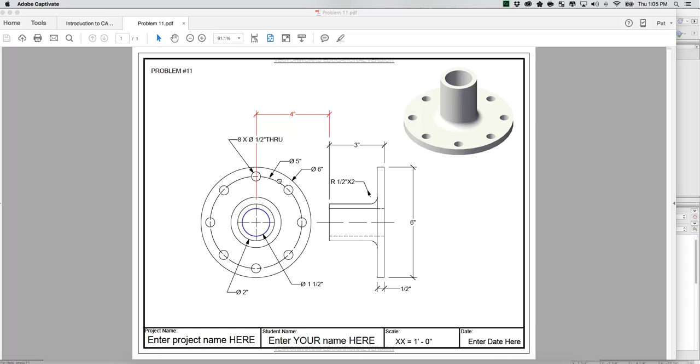So let's get going. The first circle we're going to draw, the blue circle, looks like it is a diameter of 1.5 inches. All right, here we go. Let's start 1.5 inches. Let's come over here, diameter 1.5. Okay, here's our first circle that we're going to start with.

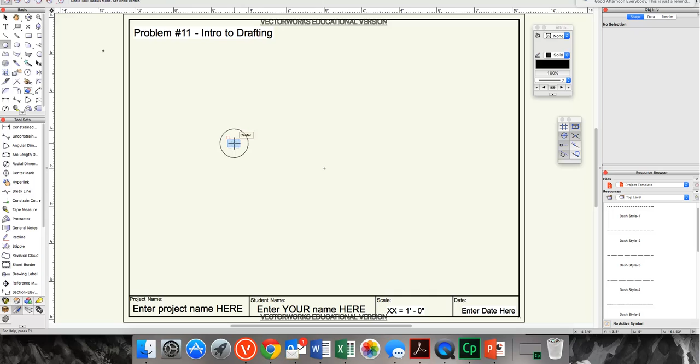Now, the next circle is a 2-inch circle. So let's give this guy a try. And 1 inch right there. There we have our next circle.

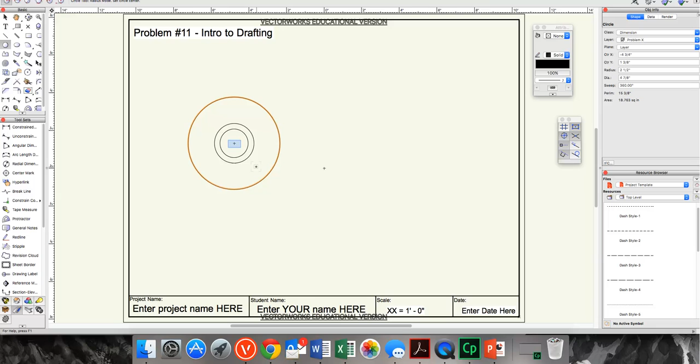And the third circle out, you'll see that there's not a dimension on that. So we will get to that point and we will be able to draw that once we get this piece over here done. So let's move out to the next circle, and that is a 5-inch circle. Again, snapping from the center. And here is our 5-inch circle. And the next circle after that is a 6-inch circle. And here is our 6-inch circle.

Now, if you look really close, you're going to see that this second circle here is dashed. And you have to look close because the circles are right on top of the dash, which is weird, but that's the way it works out. It is a long dash and short dash. So we're going to come over here to our line types, and I think it's dash style 9. So I'm going to drag this over, and here's our dashed line.

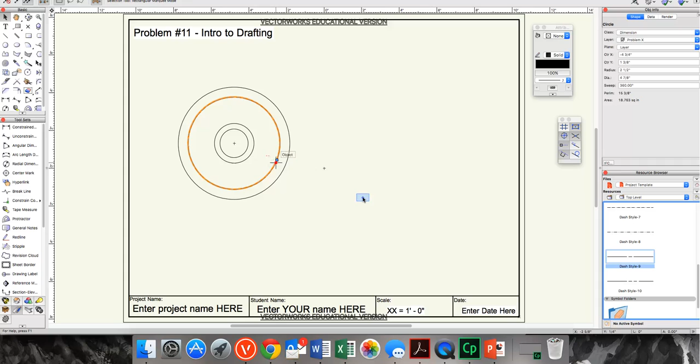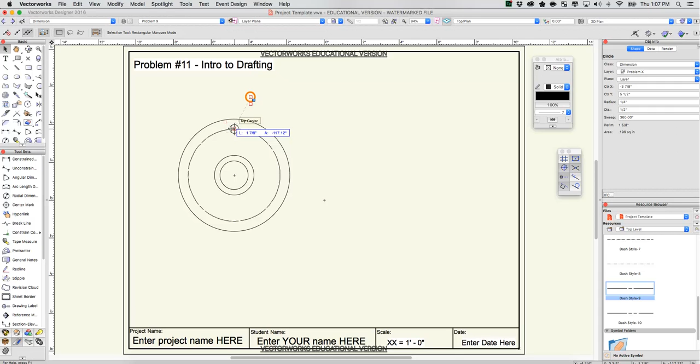The next thing we're going to do is we're going to draw these little circles, and we're going to put them in a circle. So the first circle we're going to draw is a 1/2 inch diameter. 0.5, enter. There we go. And we're going to snap that guy right to the top center of this circle. I'm going to zoom in just a bit.

Now, by looking at the project, you could, if you wanted to, drag and hold down and copy, and it's okay, we're going to do this, and it's like, yeah, you would have to play around with a lot to get them right. But there's a quicker way, and I'm going to show you how to do it, and that is up under Edit, Duplicate Array, and we're going to use a circular array.

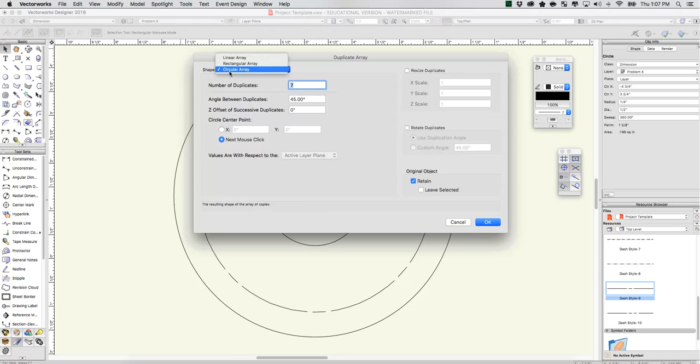You want to select, and we have to answer some questions. How many duplicates do we need? Now we need 8 circles total, so we're going to be duplicating it 7 times. And then the angle between duplicates, if we want this to go all the way around in a circle, it will be 360 degrees divided by 8 is 45.

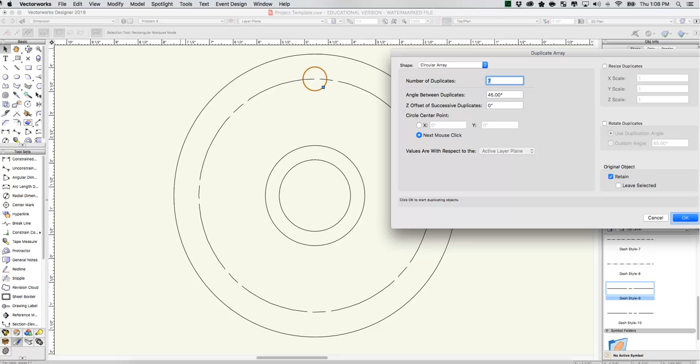And then the last thing we do is we want to tell the program, okay, what point do we want to swing everything around? So we're going to use the next mouse click. We're going to click in the center, and watch this. Kaboom, all set. And these guys are perfectly exactly on this circle, 45 degrees apart, not maybe, not kind of, exactly, which is awesome.

So the next thing we're going to do is we're going to start working on the right view. Now what I'm going to do is I'm just going to draw a couple lines over. Draw a line about here. I'll draw this line snapping right at the bottom of the circle. I'm going to grab onto this so it's the same.

And now we know what I'm drawing over here is going to be exactly the same size as this. This line should be 6 inches. Yippee, it is. Okay, now we can delete these guys.

Okay, now what we're going to do is we're going to draw the top and bottom lines. They are 1/2 an inch, 1/2 an inch, 1/2 an inch, and we're going to finish this guy up right here. And here we have that long slender rectangle.

So now what we're going to do is we're going to start dragging these lines over here. What we're doing is we're actually looking at this piece from the side. I'm going to drag these guys over, and I'm going to drag this guy over, and here we go.

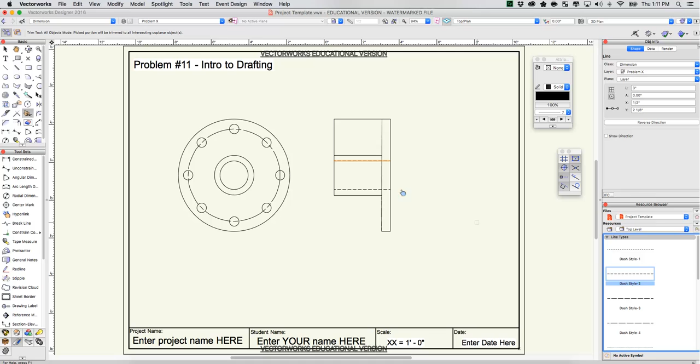Now the last thing we need to do is come in here and put this fillet in. Again, the difference between a fillet and a chamfer, which you've already done, is that a chamfer is an angle and a fillet is a radius.

So we're going to delete these lines up here quick too. Delete, delete. Oh, and we just have to draw this line across here. There we go. So now we're going to draw this fillet in here, and if we look at the dimension, that is 1/2 inch radius.

So what we need to do is come over to our fillet, select the radius as 1/2 inch, and then there are 3 options here.

You can play around with the options. Almost always I use the trim mode. We'll have to redraw the line a couple times, but for me it works out better. So we'll have this selected, and just like chamfer, we click on both lines. Here is our line.

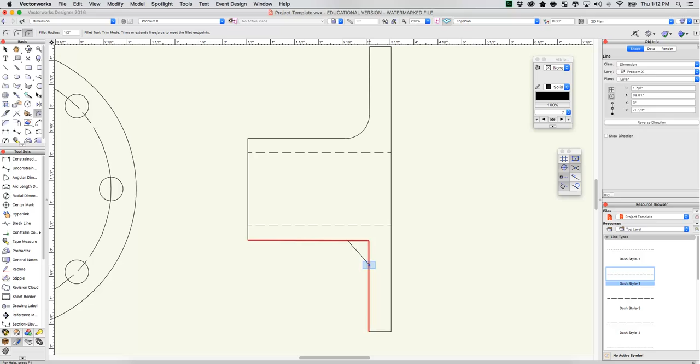So now I'm just going to come down here and prep this one. We'll do the same thing, and here we go. So now all I have to do is either draw a line in between this, or I'm just going to drag this guy up, snap it to the end right here, and here we go. That looks just about right.

So now we are ready to dimension, but as always we need to put in this center line right here, and again we have to make this on our own. So what I'm going to do is find the midpoint, draw, we're going to make our line.

Okay, draw another line. I'm going to scooch it over just a little bit, give it that gap, and then I'm going to come here and take this guy. We've made these on quite a few projects, so this should not be a surprise. Don't get lazy, we have to make these. So what we're going to do, we'll select it, group it, Control or Command G, and we'll just kind of slide that over just a little bit, and here's our center point.

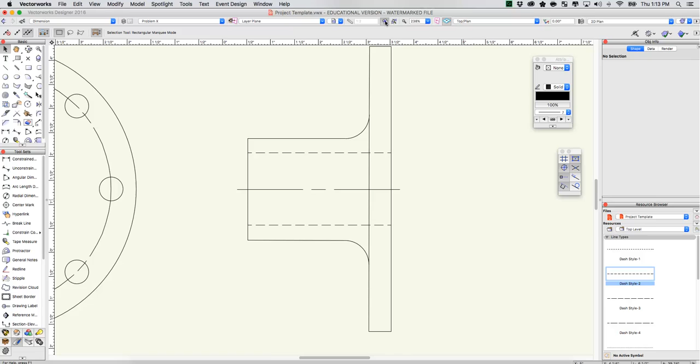Let's come back, and now we're going to start dimensioning. There's not too many dimensions, it shouldn't be too hard, but before we begin the rest of our dimensions, what I'm going to do is move him out of the way just for a second. You'll see where I'm going with this, but as you can see, the red dimension is 4 inches from the center point of the circles over to the right.

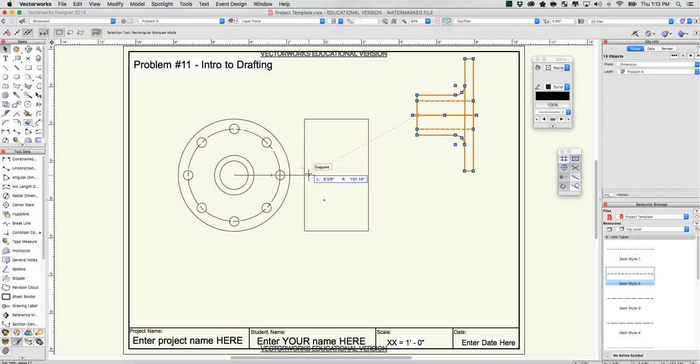So I'm going to draw a line that's 4 inches, and then I'm going to take this whole guy here and grab right at the top of the unit, not at the center line, but at the top of the actual tube. Come over here, snap it onto that line, delete the line. Now these guys are exactly 4 inches apart as specified in the instructions. I'm going to move them over just a little bit.

There we go. So now let's do our linear dimensions. Let's see here. Click here and here. Here is our 3 inches. Let's do our 6-inch dimension.

Let's do our 1/2-inch dimension and see how that comes out. I'm going to drag this dimension out to the side so it looks a little cleaner, a little easier to read. I think that is all of our linear dimensions.

Now we are going to do our radial circular dimensions. Let's start over here on the fillet first. It looks like that's an interior radial dimension, a little hard to tell. So we're going to come back and look at that interior radial dimension. It looks like we need to switch the shoulder over so it flips this way.

Now we're going to come over here, and I'm just going to start from the inside circle. These are all, looks like, exterior diametrical. So we're going to come over to exterior diametrical, and let's check the shoulder. And here we go, we're going to do the interior one.

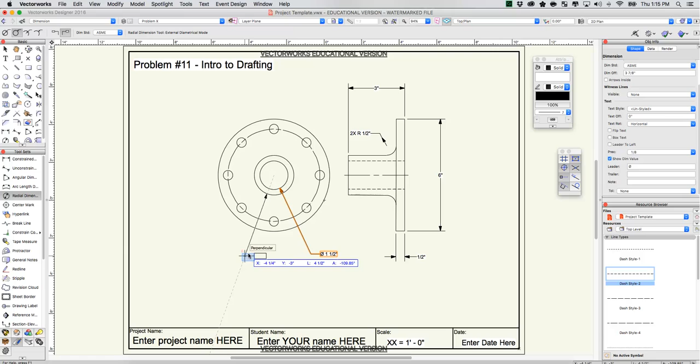Here we go, 1.5 inches. We're going to do the next one, 2 1/8 inches. Let's do this inside circle. And we're at 4 7/8.

And I drew the diameter at 4 7/8 instead of 5 inches. So we are going to fix that quick, and I will show you how. We're just going to redo that command, so it's not too difficult.

I'm going to delete all these circles. We'll do it quick—these things happen, guys. You'll notice things, and instead of just letting it go and saying, okay, nobody's going to notice—yeah, they will notice. It's 1/8 of an inch off. That's a lot. So let's change it to 5 inches.

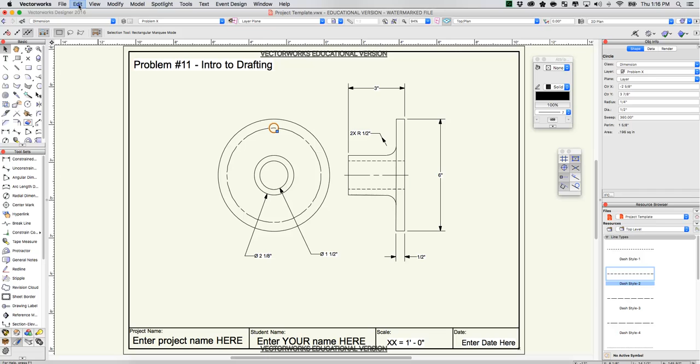There we go, we're going to snap our circle back onto the top. We're going to come back, redo our command. Everything should be selected: circular array, 7 duplicates, 45 degrees. Next mouse click, there we go. Problem solved. Now we're going to come back, and hopefully that dimension will be right. Let's see—I believe it is.

Excellent. Now we're going to do our 6-inch, and we are going to do our small dimension. And now this guy, we have to add a couple things because we are creating 8 of them.

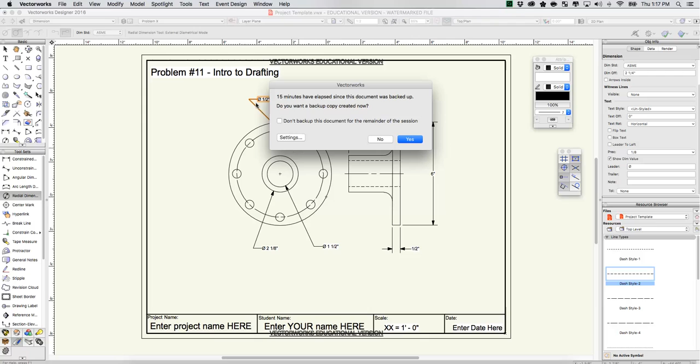And you see that note there that says through. That note is there to tell us that those holes are going to get drilled all the way through, so we don't have to have a bunch of messy little hidden lines over here. One note replaces all these lines.

That's pretty nice. So what we're going to do is make sure the dimension is selected. Come over here to leader, and we are going to do 8x space, and then we're going to do through, space through, space. There we go, and there's our dimension.

Now there's one line. Everything, I think we have everything. We have this guy ready to go. Everything is dimensioned. The one thing we haven't drawn is our center mark. Here's our center mark. The only thing we need to draw yet is this 3rd circle.

And if you've been wondering where that is, remember we're looking at this from straight on. That 3rd circle is where this fillet meets the plate. So it's really easy to draw in.

What we're going to do is draw from the end point of that arc. I'm just going to draw it right here, and just a line, it doesn't matter. I'm going to draw one more circle from the center point out to that line. I'm going to delete that line, and that is our final circle—the final thing to do to make sure this drawing is right.

So let's take a look at it. Man, that is rocking right there.